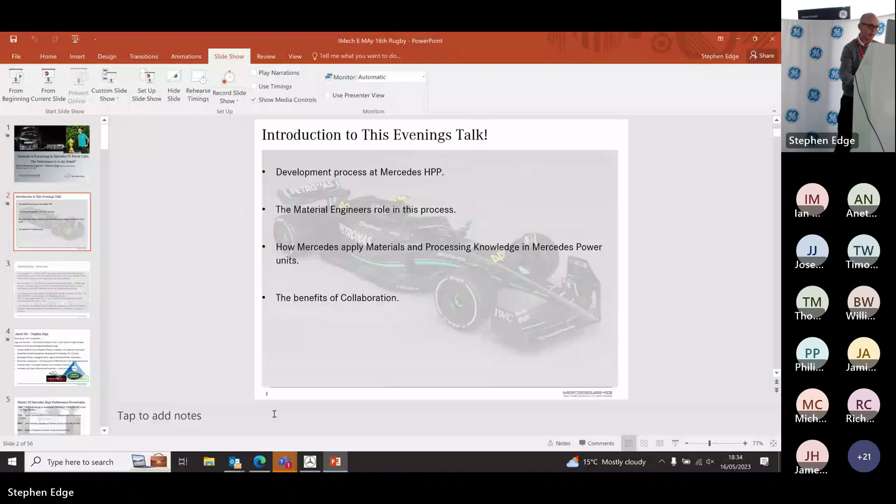Sure. Second. Here now. Apologies, just trying to get the technology right first.

Thank you very much, Naaman, for that lovely introduction. First of all, it's great to be here. It's lovely to actually see people in person. I have to say, it's been a very long time since I've done anything in person. I think it's been about 4 years since I've actually seen some faces looking back at me when I'm doing a presentation, so it's a genuine pleasure to see people here tonight. And of course, nice of people to join in as well on Teams. Before I go any further, I just want to say a big thank you to both Howard and Naaman, not just for inviting me here to talk today, but also for the hard work they put in. These events do take some putting together, organising, so a big thank you very much for the hard work you do to get these events working.

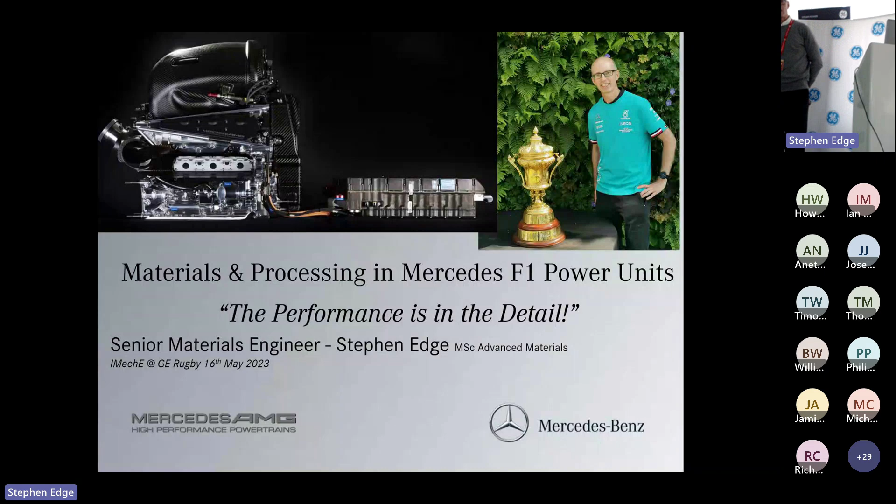Let me introduce myself. My name is Stephen Edge. I'm a materials and processing engineer at Mercedes High Performance Powertrain, that's where we make the Formula One engines, amongst other things. Today I'm going to talk to you about materials and processing and how the performance is in the detail.

Before I go any further, see if I can move that down there slightly. Not going to move, is it? Minimize it, that'll do. Right, quick introduction to what I'm going to talk about tonight.

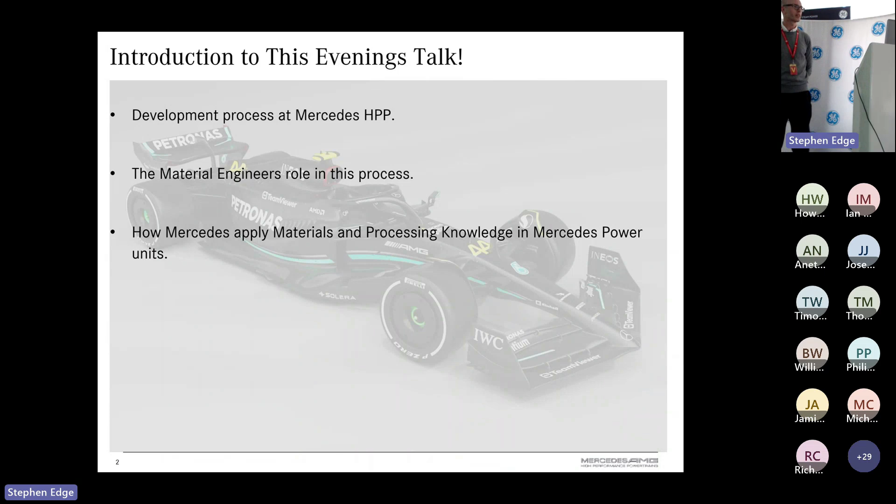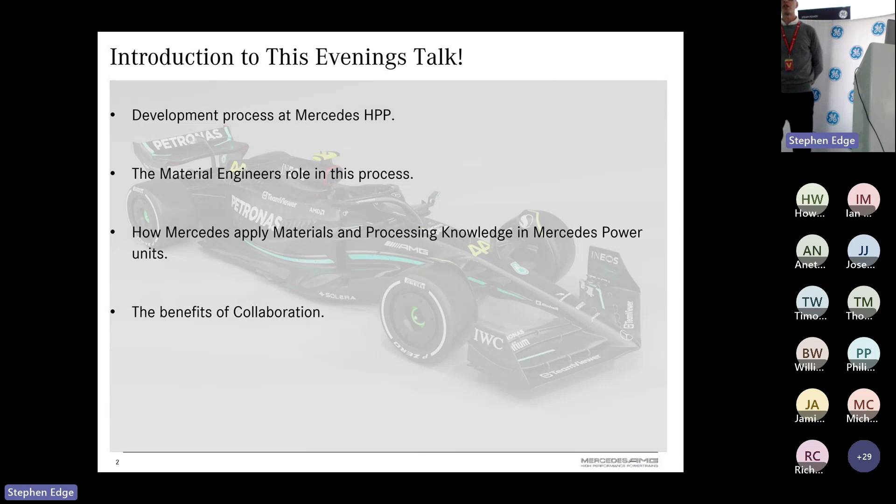First, I want to talk about the development process that we have at Mercedes. It probably follows along the same sort of development routes that a lot of engineering firms would recognise, but I think we do things a little bit differently at Mercedes. I want to talk about the role that materials play in this, and as a materials engineer, how I fit into those processes, and how Mercedes actually takes some of that knowledge that we get as a materials engineer involved in those processes, and how that fits into the power units themselves. Lastly, I really want to talk about the benefits of collaboration. So when Naaman asked me to come and talk, it's really a good opportunity to work with engineers, because on a daily basis I work with engineers, I work with manufacturing, and we really see the benefits of collaboration. Hopefully we'll be able to see the benefits of collaboration.

So a little bit about me. I think Naaman probably said a little bit more than I expected, so I'm just going to whiz through these. Growing up, I had two passions in my life, which are both Lego and Formula One, so that naturally ended up with being an engineer, but not a traditional engineer. I always had a materials and processing based career. Started off in research and development at Alcan in Banbury, diversified into doing things like PVD coatings, so DLCs and titanium nitrides, developing coatings like that. Worked in the aerospace industry, AgustaWestland, looking at military helicopters. That's where I sort of learned a lot of the failure investigation skills. Then at JLR, looking at powertrains, transmissions, and helping with the electrification side of things. Got myself an MSc in materials from Cranfield, and finally put all these skills together, working at Mercedes AMG High Performance Powertrains.

I want to say a little bit about Mercedes AMG High Performance Powertrains. I think it's quite important to understand the process, understand how Mercedes do things a little bit differently. So what is Mercedes High Performance Powertrains?

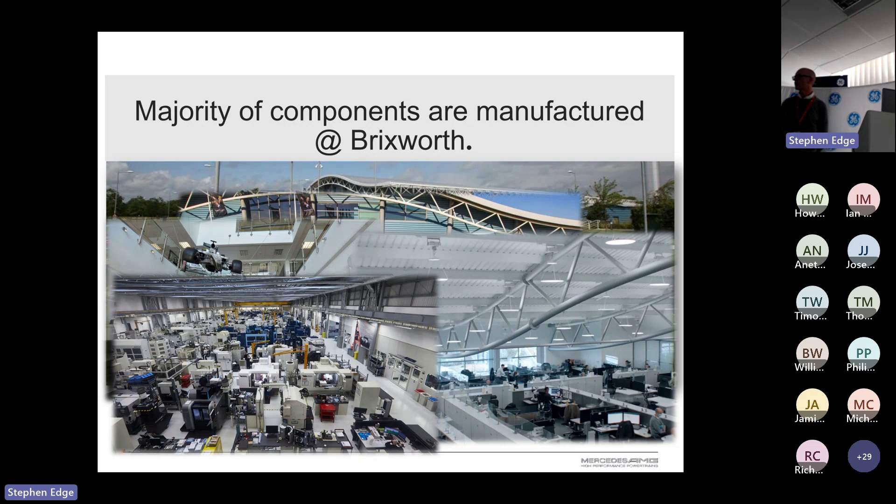Within Brixworth they've got the dedicated design centre. Right next door, quite literally 30 seconds walk from my desk, you can get to the manufacturing hall. The manufacturing hall makes something like 70% of the components, so all the machining happens next door. They've got a huge amount of capabilities, all sorts of different machines to get things turned around and manufactured quickly.

And then finally, they do the testing there as well. All the engines are tested on our dynos. We've got something like 8 dynos over at Brixworth, and that helps give us the cycle.

So you've got the ability to design the parts, you can then manufacture the parts, and then you can test them. What that generally means is if something's gone not quite as you expected on the dyno, within a couple of days we'll have it re-engineered, manufactured, put back on the dyno, and testing within a sort of 5-day turnaround. That's one of the key parts that helps fast-paced development—having everything under one roof and so accessible.

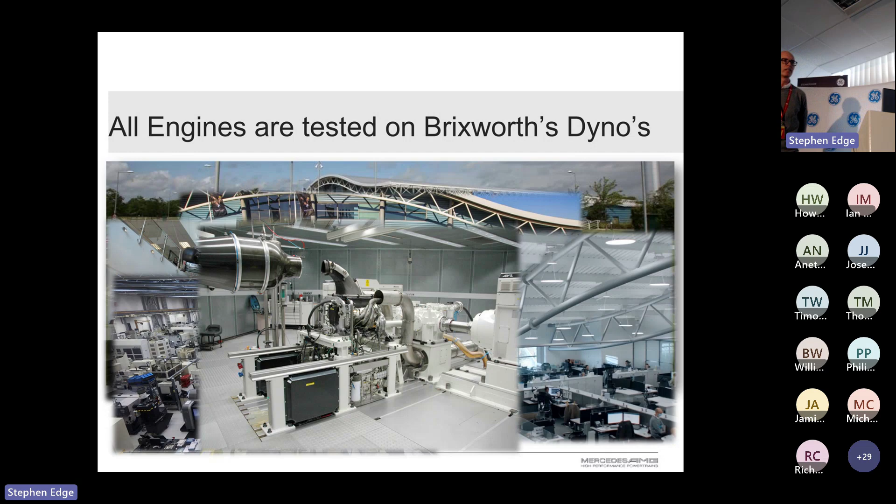We don't just do Formula One there. We're rapidly being seen by Stuttgart as part of their rapid prototyping, rapid development process. So we worked with Mercedes on the EQXX.

Not sure if anybody's aware of EQXX - this is a record-breaking car that's actually done 1,000 kilometers on one charge. At Brixworth we engineered the battery for that, and that was completed in a project time of 9 months from inception through to delivery of the component.

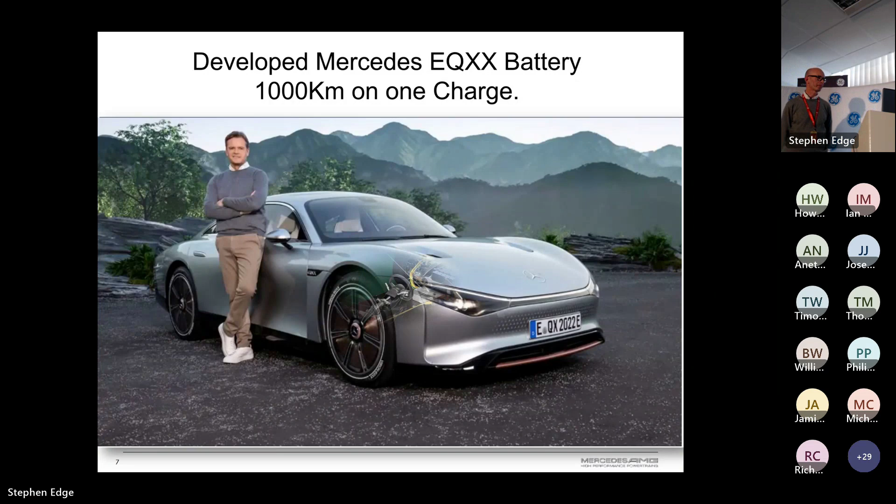We've also got very interesting projects down there. Project One, once again a very high-end project for Mercedes Stuttgart, is quite literally a Formula One engine in a road car. That was the biggest challenge we've had—trying to take a Formula One engine, and I can say wholeheartedly it is a genuine Formula One engine in there, trying to make it road legal.

That's one of the biggest challenges we've had, and we're still going through it, but I believe some of the customers now have those cars in their hands. So it's a real sense of pride down there for that project as well. We do other projects too—it's very much an engineering centre, but the main thing that we do is our Formula One project.

The main thing to think of with High Performance Powertrains is we are actually a supplier to the Formula One teams. We supply the powertrain to the Mercedes Formula One team, but also customer teams of McLaren, Aston Martin, and Williams as well.

That's a little bit about what they do down there. What is it that Mercedes HPP actually make? The reality is they make very efficient powertrains.

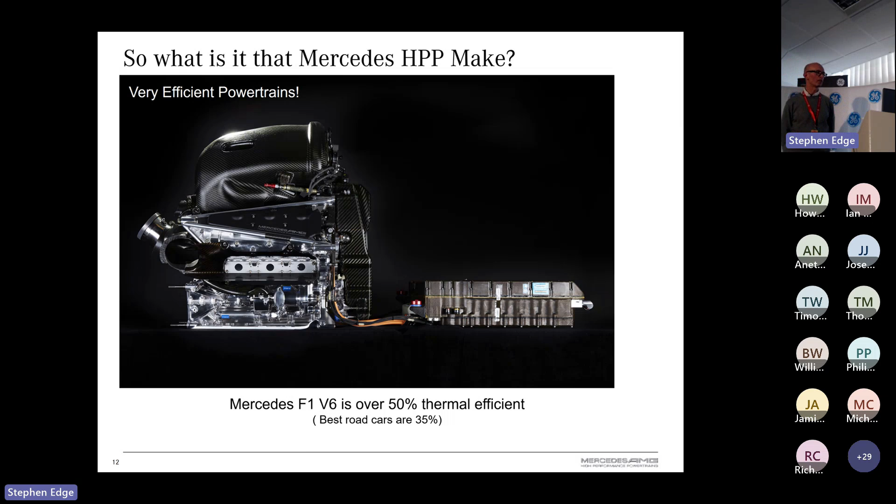The current iteration of the Formula One engine is a V6, and this is over 50% thermally efficient. The average road car at the moment is 35% efficient, so it's a much more efficient power unit than you can get in general road cars.

And how do they do this? This is a 1.6 litre 24 valve V6, 15,000 RPM, and they have two powerful motors in there that really make a big difference to the power unit. The first one is the MGU-H. The MGU-H is an electric motor that goes within the exhaust system, and when the exhaust gases go through it spins a turbine that generates the electricity that goes into the battery.

When the engine's not spinning so high, it turns into a motor, and that spins the turbo to get rid of turbo lag. So it's quite an ingenious and innovative component.

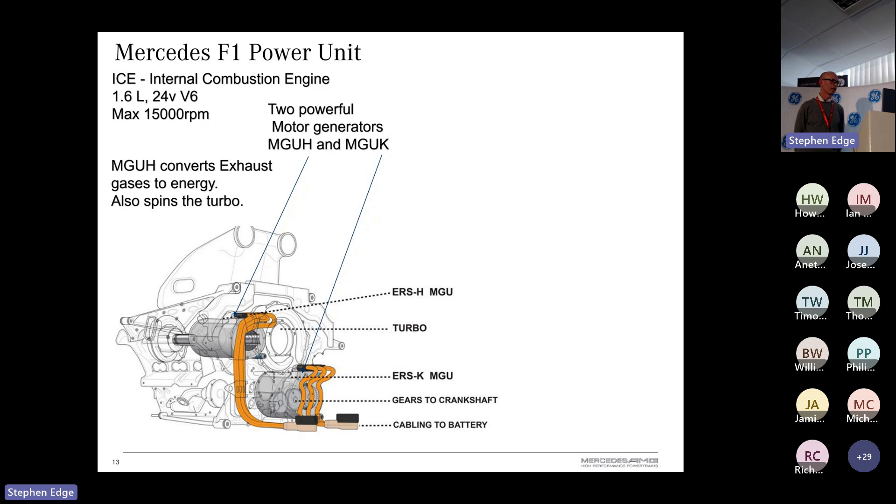The other side is the MGU-K, motor generator unit kinetic. The kinetic side is because it's connected directly to the crank, so that provides another 160 horsepower worth of electric power on demand.

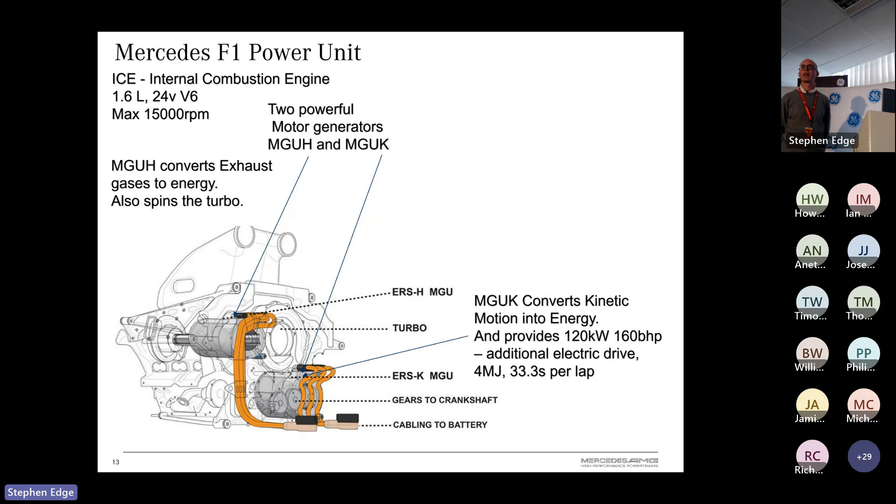So it's 33.3 seconds per lap. And under braking, that turns into a generator as well, feeding energy back to the battery.

And of course, the last bit, probably the bit most people forget, but one of the hardest working parts, is the battery.

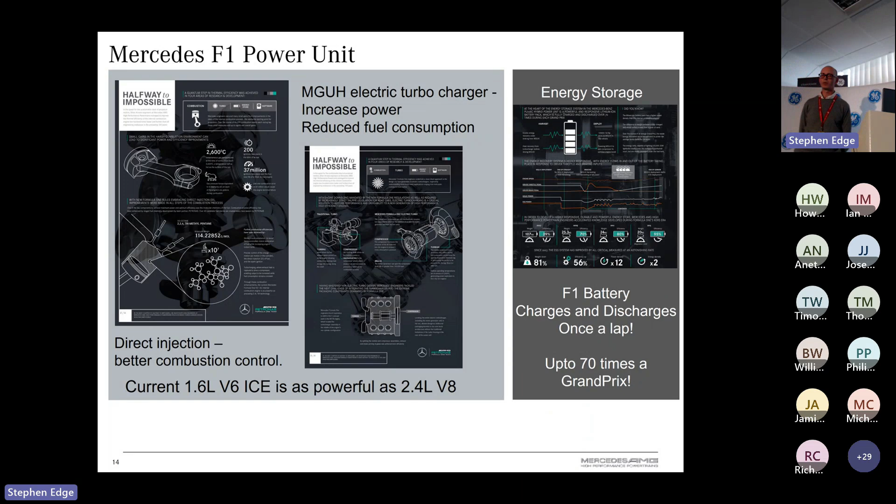So in Formula One, the batteries and battery packs you see are very different to anything you'll see in road cars at the moment.

So that's a lot about Mercedes, a lot about the projects and things that we do. But what I really wanted to talk to you about today, and try to piece it all together, is how does a materials engineer work in this environment, and what do we actually do to improve things?

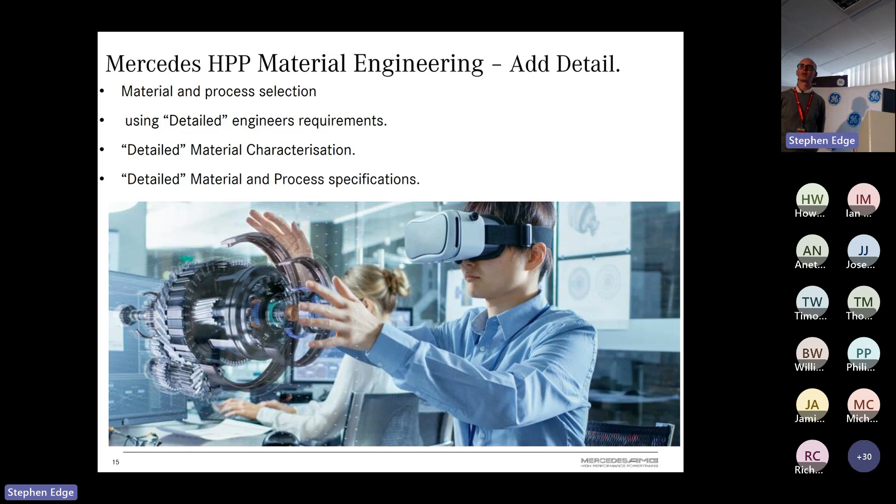And then lastly, material and process specifications. Having done a lot of work on characterization, you have to make sure the properties you get are accurately reflected in the manufacturing processes used, so we've got to make sure it's a robust manufacturing process.

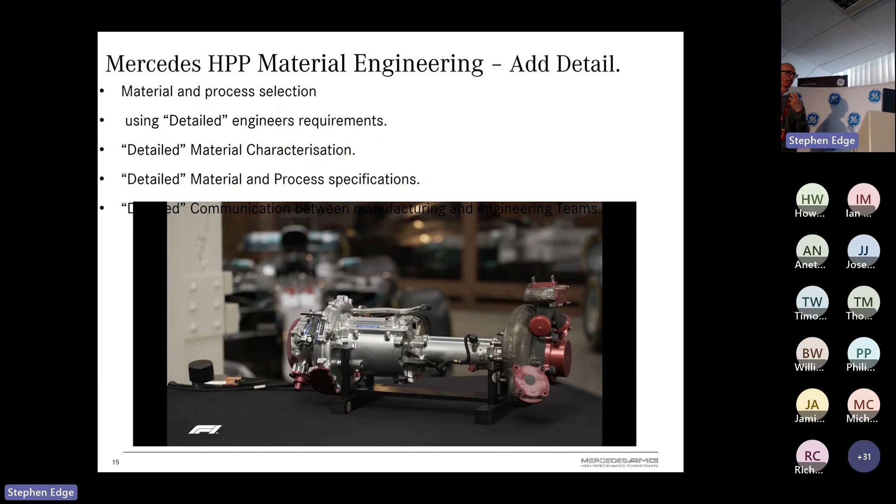So quite often we're just that link with detailed communication between the engineering teams and the manufacturing teams. This is where we add value, trying to take the engineers' brilliant ideas and make them into reality for the manufacturers to actually create what the engineers wanted.

So we've got a few constraints in there. What sort of constraints do we have? In the motorsport world, we're a low volume manufacturer, so we can't go and get people to develop materials for us, because we make maybe 50 parts, 80 engines a year maximum. Nobody's going to develop engine materials for us, so we're restricted to use whatever's available.

So we're quite often using what's available from aerospace, from automotive, but also the FIA technical regulations - that's one of our biggest restrictive constraints. They require that anything we use, all manufacturers are able to get hold of as well, so anything that Ferrari use, we should be able to get too, and vice versa. We can't create our own processes and squirrel it away - it's deemed unfair, apparently, so we're not allowed to do that.

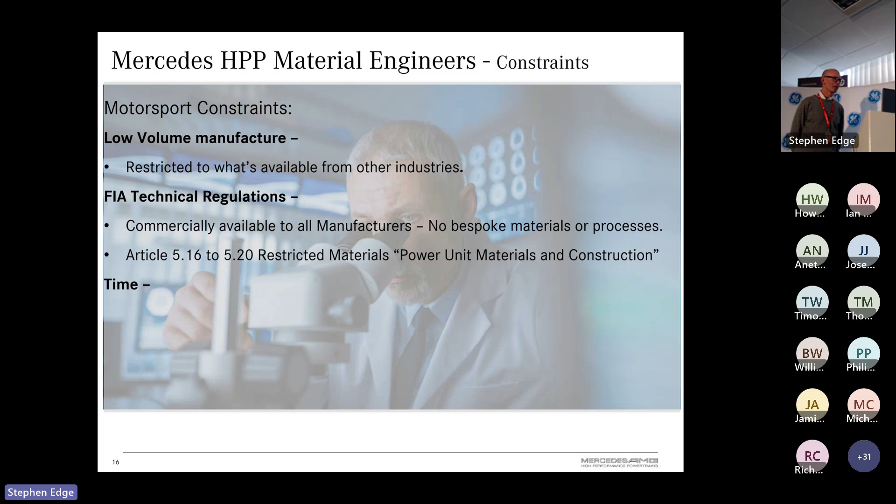We've got restrictions on the actual materials we'd like to use. We'd like to use things like metal matrix composites and magnesiums, but the FIA regulations restrict what we can use. But there are also some grey areas where you can sometimes exploit the rules, so that's one of the fun sides of the job as well. But the biggest constraint that we have is time.

When the red lights go out, whether you're ready or not, you've got to be ready, essentially. So at Mercedes, time constraints drive everything that we do.

The issues that we have are generally trying to get applications and processes ready. Quite often an engineer will require us to come up with an idea, whether it's been driven from a failure investigation or something they've developed. We have to act fast to provide a very robust application process, whether it's a new forging or a coating, we have to make sure it's applied robustly.

Sometimes we have to do bespoke testing. We have to get a little bit innovative. Sometimes we just don't have the time to go and get tensile specimens made out of a component, so whether it's just a hardness check, something very rudimental. We've made 3-point bend tests out of tiny little specimens just to try and understand the strain rate of a nickel plating. So we can do all sorts of different tests.

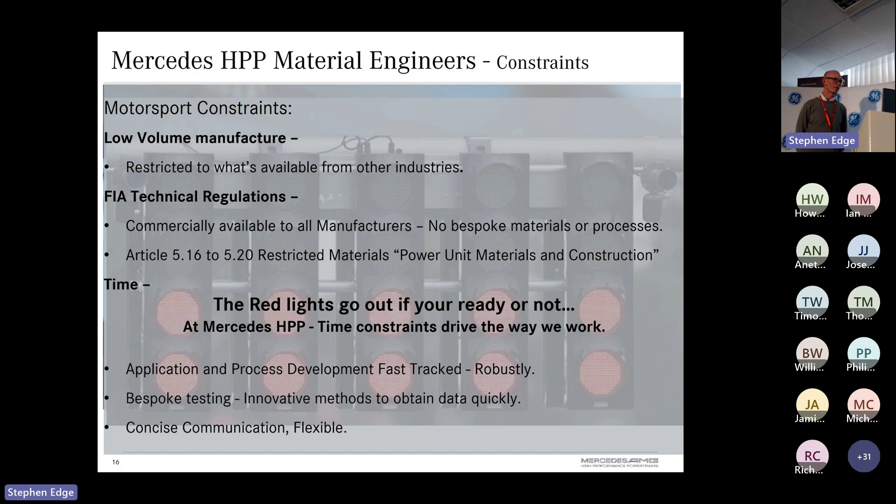So that's a bit about materials engineering at Mercedes. I like to think that the role is always split down into four main points, four key application processes that we're involved in.

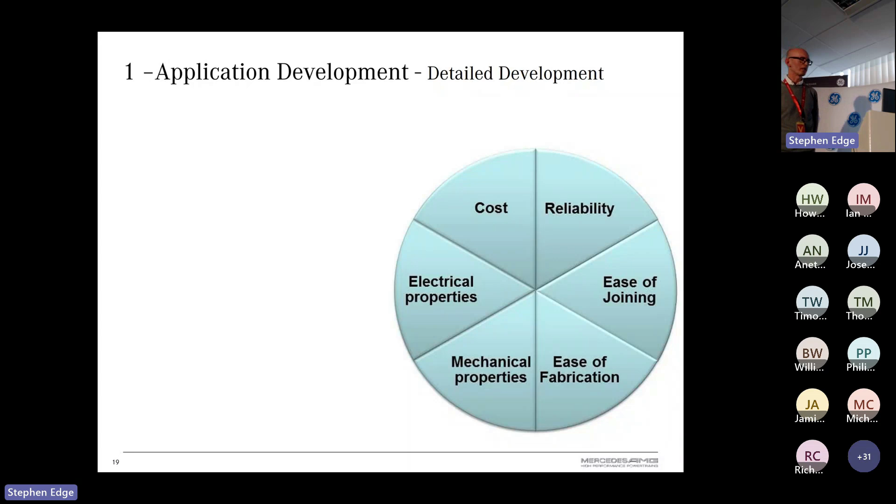So we've got the development side of things, where we add detail at the development process. The engineers define the concept, and we provide whatever materials or processes we think fit the bill to get their concept working the best. This time can vary anywhere between one week or six months, depending what the issues are.

The sort of materials that we quite often use though are things like aerospace alloys. We're very fortunate in that we can get hold of aerospace grade nickel alloys or titanium aluminides, and we can use these sorts of materials. As a materials engineer, it's an absolute dream to be able to play about with some of these more innovative materials.

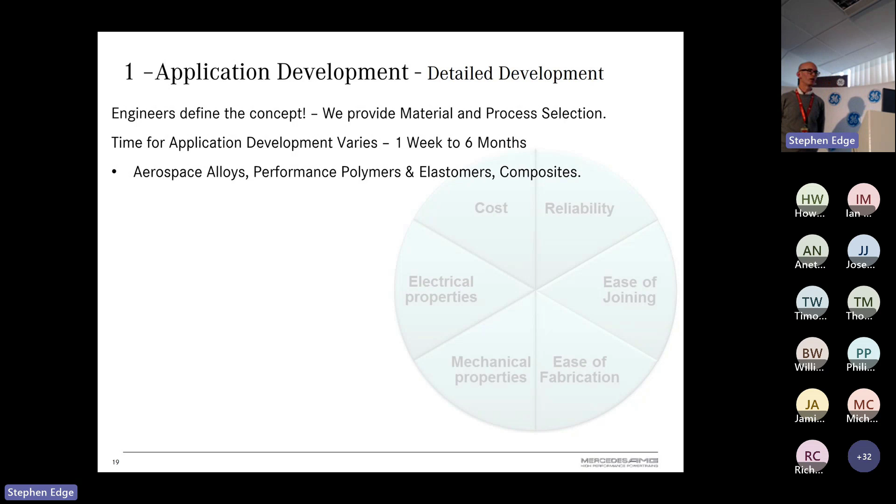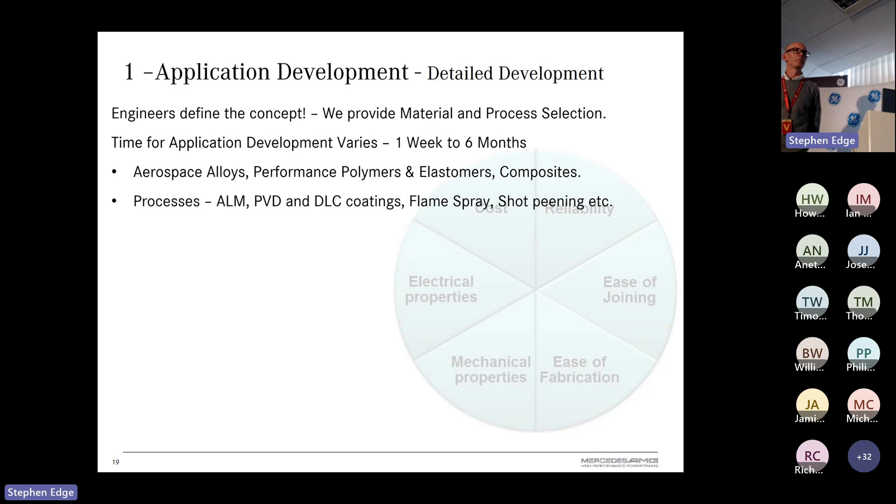We use things like performance polymers, PEEK is something we regularly use, things like polyimides, elastomers, and we use some composites as well. We also have access to all the different processes, so anything like additive layer manufacturing, physical vapor deposition, DLC coatings. We apply whatever's required to make the component live in the very harsh environment that is Formula One.

We have to do all this with the restriction of the FIA regulations, say articles 5.16 to 5.20. Those are really our Bible, that tells us what we can and can't use.

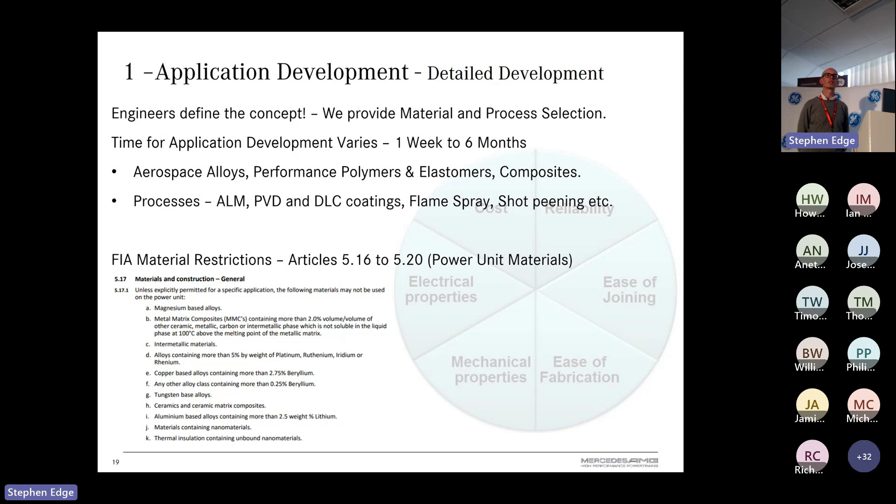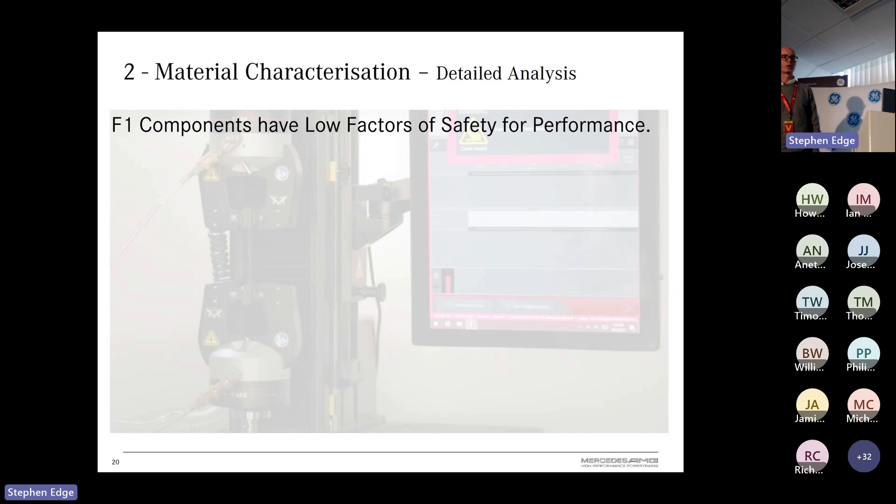Materials characterization, I touched on that earlier, but this is where materials engineering, we're once again adding the detail. We've got very low factors of safety within the motorsport world. The reason for the low factors of safety, fairly obviously, is performance. We have to make sure we don't have too much excess material. We want to cut it down as much as possible, that's the only way you're going to win.

So if you've got such low safety factors, you've got to get very accurate. I think this is one of the key parts where materials engineers make a big difference, is that we make sure we have very accurate material properties. So whenever we're doing any characterization, we make sure we've got the material processes involved.

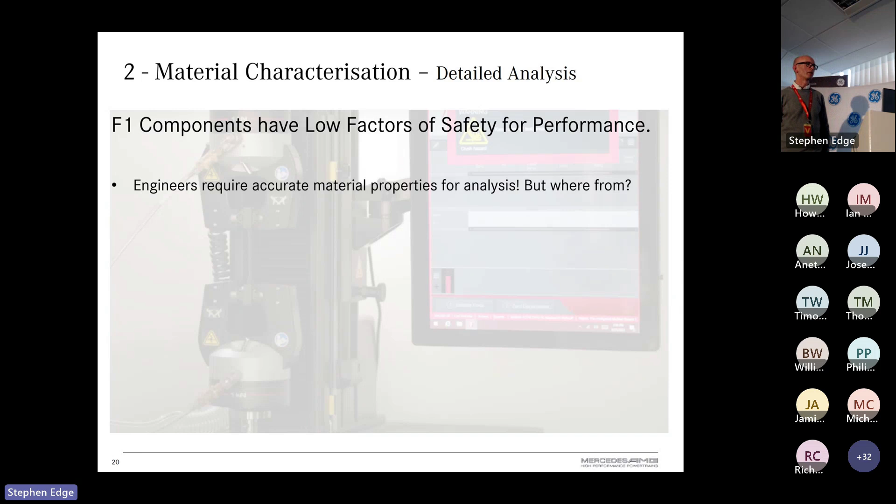If you think about where do we get properties from, you can try Googling it, but I'm not sure if you're going to get the properties of nickel alloys at 800 degrees. That sort of thing just doesn't really exist. And even if you could find it, would you trust it? Do you know anything about the data analysis that's gone behind it, the material that it's got there? You can't do those sorts of things.

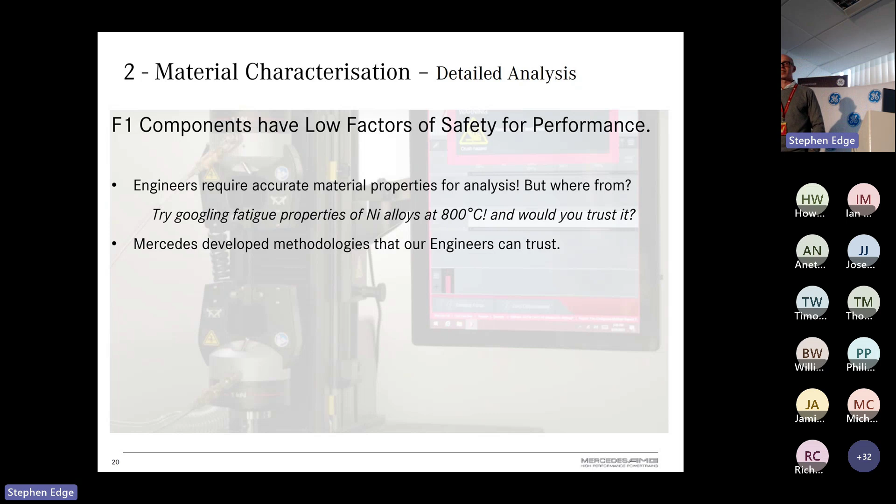So at Mercedes, we have a highly developed methodology that the engineers trust. All our data, all our processes that we use, and all the materials that we use have been captured and characterized by ourselves.

The key part is that we make sure we've got the manufacturing processes involved. So whenever we're doing a material characterization, we make sure we're not just doing the material with the right heat treatment, we make sure we've got the right surface finish, the shot peening effect, and the coating that's actually going to be applied.

Because when you're working with factors of safety of about 1.2, you can't afford to be anywhere slightly off. So we've got to make sure that we replicate absolutely everything the component is going to be in there, so that the engineers can put it into their analysis.

Once again, sometimes we do our own bespoke testing, depending on what we need to do. If we can't find an off-the-shelf test, we'll do our own test, whether it's testing the wear of an abradable coating or something along those lines, to generate our own data.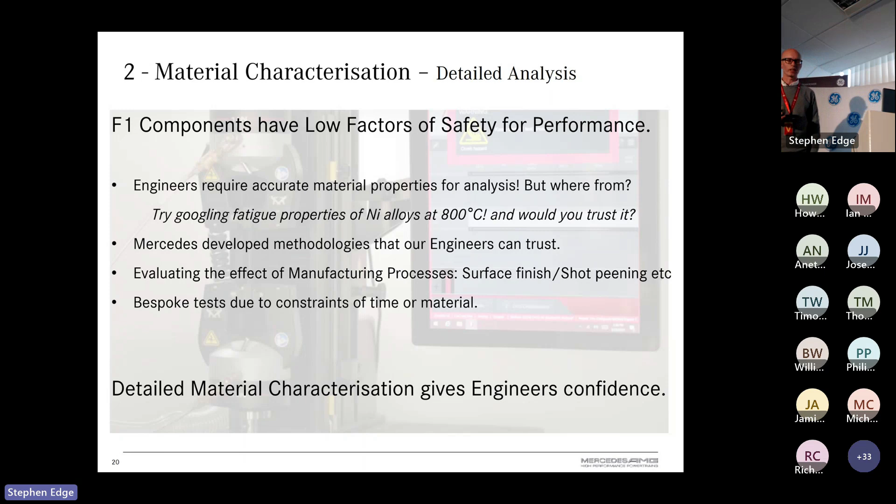But it's this detailed characterization that really gives our engineers the confidence, so they can design down to the factors of safety that get us the performance.

The third part of this is materials and processing controls. Having done all the hard work of the characterization, making sure you've got the right properties and the right surface finish, you've then got to make sure that when it comes to manufacturing the components, you are going to be getting what you've already measured the properties for.

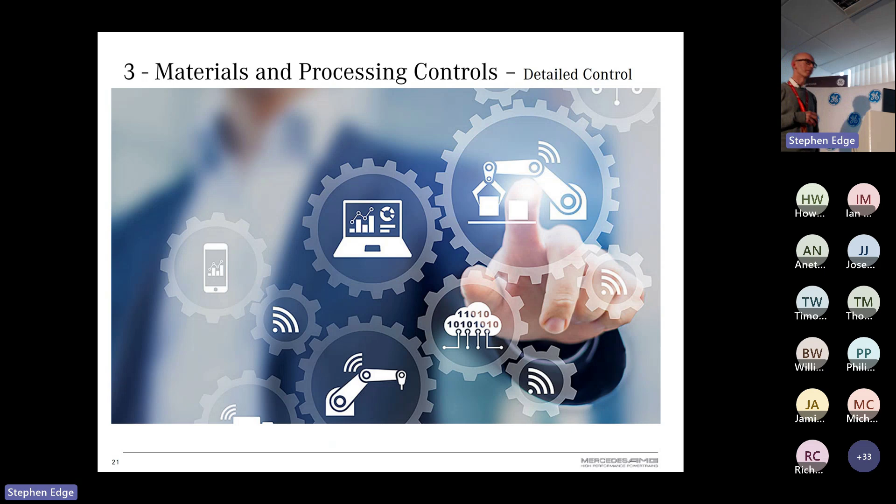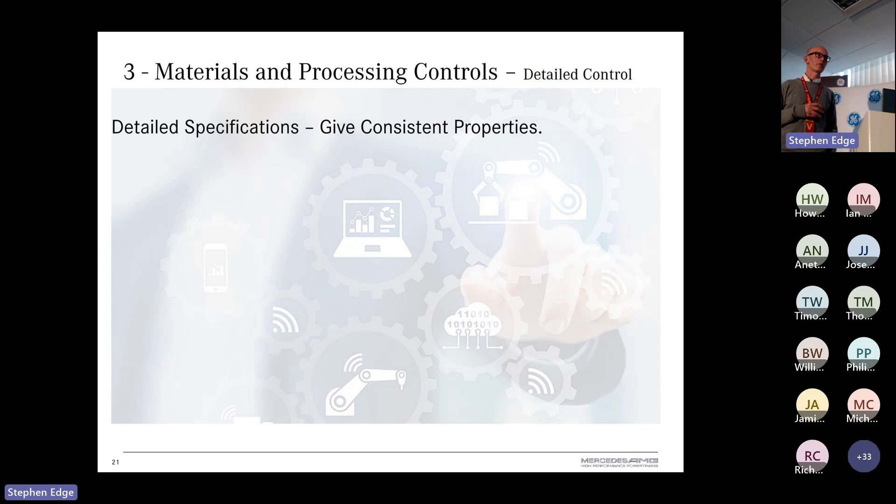So we've got to make sure we've got a detailed specification with a very small processing window. This is the key to getting consistent properties. We don't like surprises, and we've got to make sure we get consistent properties from our supply chain or from our internal manufacturing.

We do that through detailed development of our supply chain, so the suppliers are actually developed. We have a selection of supply chain companies we work with, and we treat them as an extension of our team. They are all aware of what we're trying to do, and they're all brought onto that same mentality of high quality. We've got to make sure the internal documentation captures the process envelope.

It's absolutely crucial that we don't have a very wide manufacturing envelope for our parts. But also traceability is a real key part, and that's really for things like failure investigations.

We make sure all our supply chain knows exactly, down to the serial number, how they can trace back to what they have manufactured and what heat treatment process was used, things like that. There's some real detail that we go through, and that helps with our development feedback loop.

So all the team members and suppliers understand the consequences of any change to the process. They know that if you've got any change in surface finish, residual stresses, or microstructure, the properties are going to be very different to what you've measured, and that means the component is going to behave differently to what you're expecting.

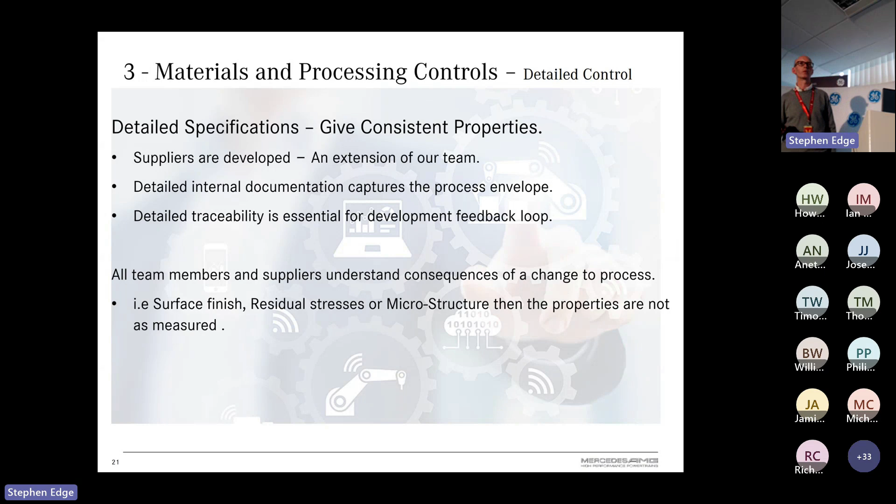So a quick example of how we would complete a process development on a component, and how a materials engineer would fit into that: let's take an additive layer manufacturing metallic component as an example.

The engineers would come to us and we'd talk through what it is that they're after, what sort of properties they need, and then we'd look at our chosen supply list. We'd have 3 or 4 different suppliers we'd work with, and we'd select which one depending on various constraints, like material properties, volumes, and how quickly they need it.

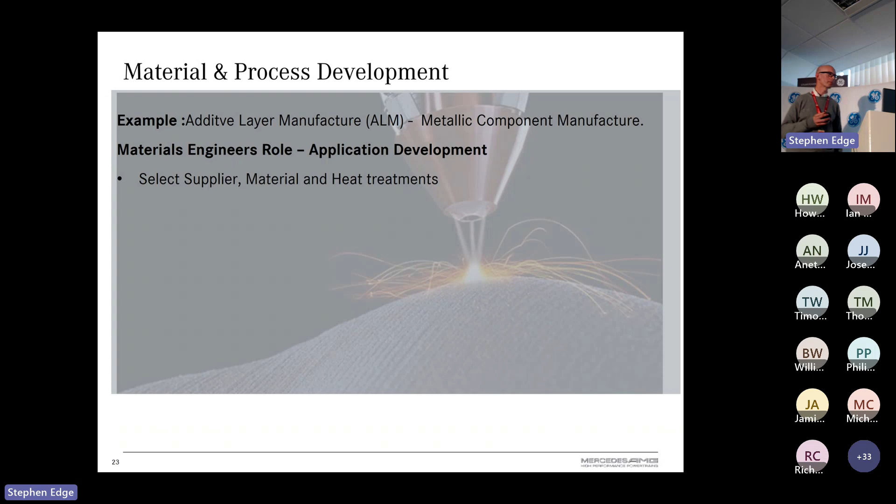So that would be the application process, the development process.

Then, if we don't have material properties, we'd have to go away and measure the mechanical properties of the part. We have to make sure we've got the properties of the component with, say, the exact powder size, the right powder, traceability of the right powder, and whatever properties are needed, we would be doing those tests, whether it's fatigue, thermal, whatever the engineers need for finite element analysis.

We'd always be making sure we're putting into that the surface finish, for instance. We have to do a HIP, heat treatment, shot peening.

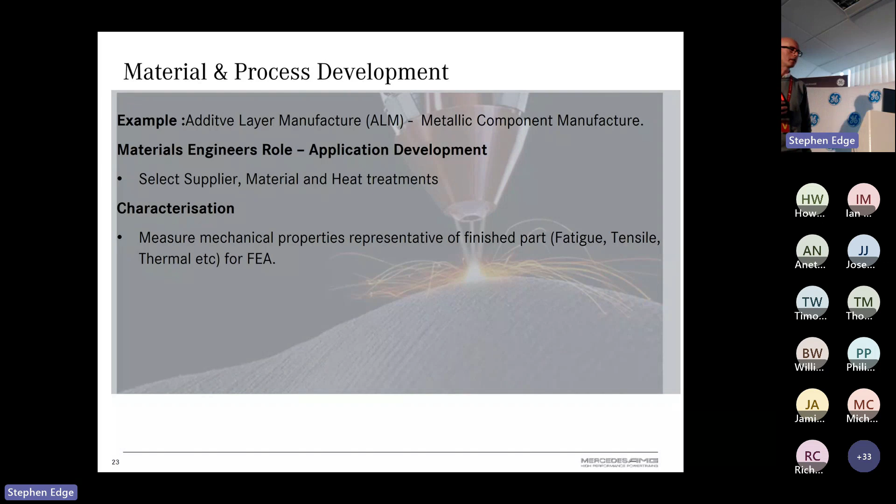We'd make sure that all that is put into the testing to make sure our results are accurate. And then finally, the standards control side of things, making sure the requirements capture exactly that process envelope.

So we'd make sure the processing requirement window is as small as possible. We also make sure we've got an inspection criteria, whether it's something like having a tensile test specimen made up with the components, so you can test each one to get that feedback loop, whether you're doing NDT testing like CT scans or something. We put all that detail into the specification as well.

So each step of the way, we'll be working with the engineers, taking their ideas. We're working with the manufacturers as well, manufacturing engineers and the supply chain. And we'd be, as a materials engineer, in the central hub, trying to capture all that data, generating the right data for the engineers, making sure that detail is all captured and the results are correct.

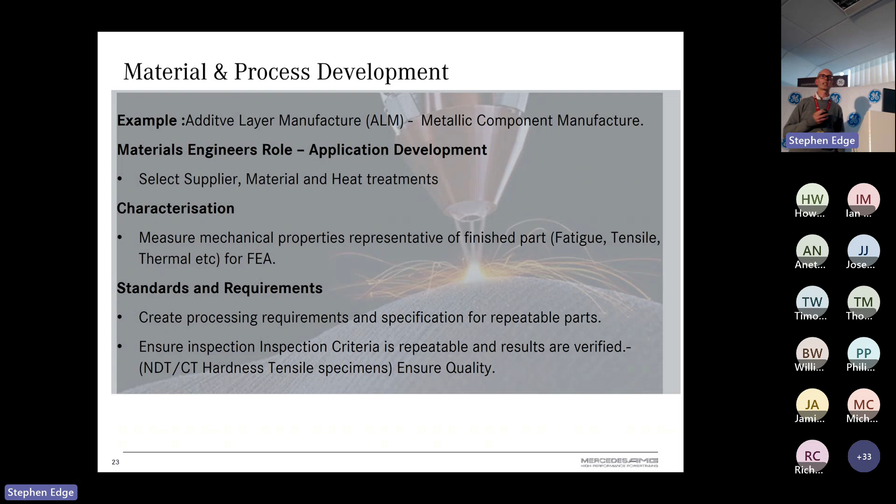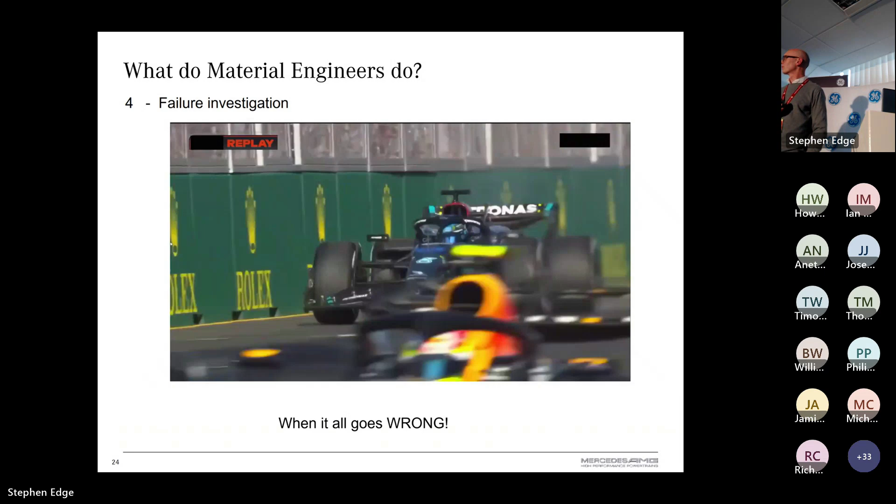And of course, there is the fourth element of what materials engineers do: when it all goes unfortunately wrong. You may recognise this from a couple of races ago.

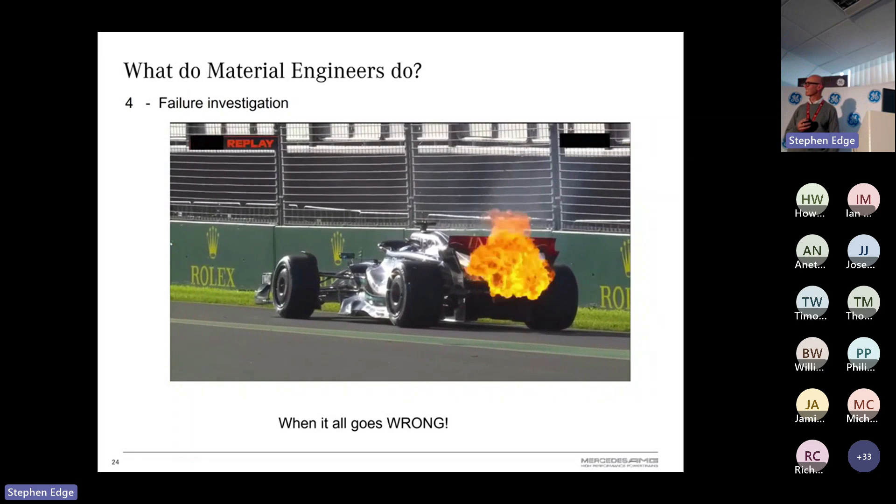It's like these that really ruin my Sunday, I can tell you. I know my week is going to be very bad when I see things like this. And George didn't look very happy either. But yes, failure investigation is a big part of what we do as a materials engineer as well.

And when we see things like that, the engineers want to know three things. What's the failure mechanism? Has it failed by overload? Has it failed by fatigue?

And where has it failed from? Has it been a manufacturing defect? Is it design? Is there a material defect in there? And does the material comply with the requirements?

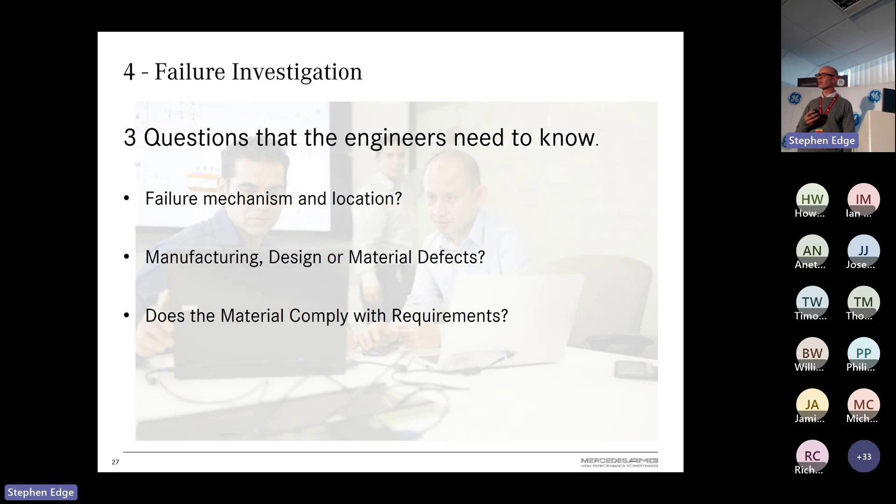I've lost count the number of times the first thing people say is, 'Oh, check the material. Is it the material's fault?' It's generally, I think, 2% of failures are ever actually a material fault, but it does happen. That is true.

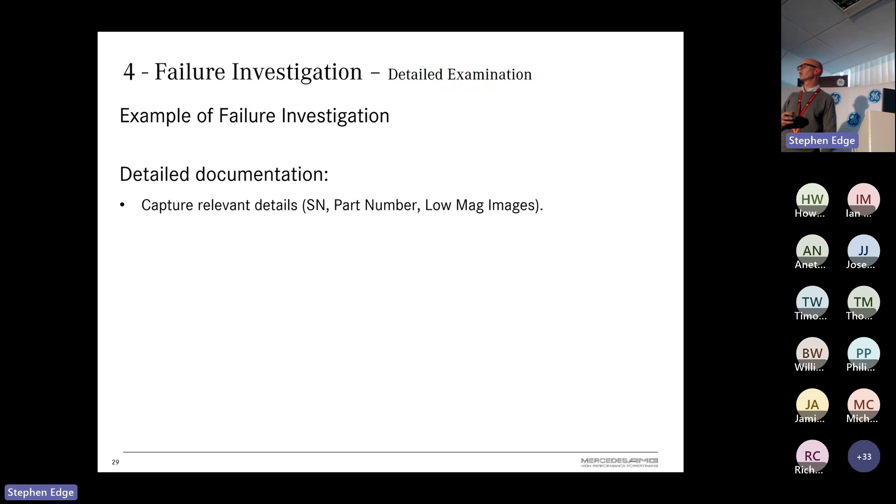So a quick example of a failure investigation. Once again, materials engineers are there hopefully capturing the details, things like serial numbers, part numbers, getting low magnification images, making sure everything is captured. And then we're going to be collaborating with the engineers, understanding what was going on with that particular powertrain before it went bang.

So we're extremely fortunate that we've got sensors all over everywhere. We know exactly what this engine was doing up to a millisecond before it went bang. So quite often we're led in a certain direction of what has gone wrong.

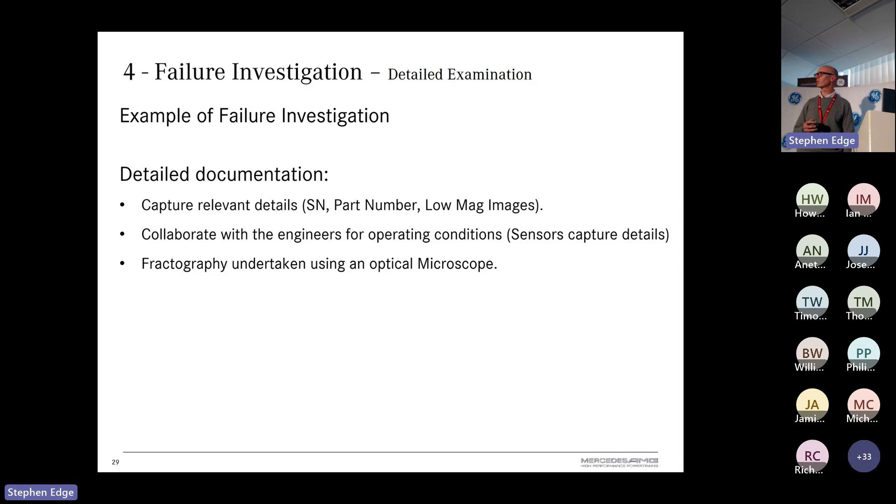And we'll take a look at it underneath the microscope and do a bit of fractography. Unfortunately, I'm not particularly very good on that. But we've got a component here.

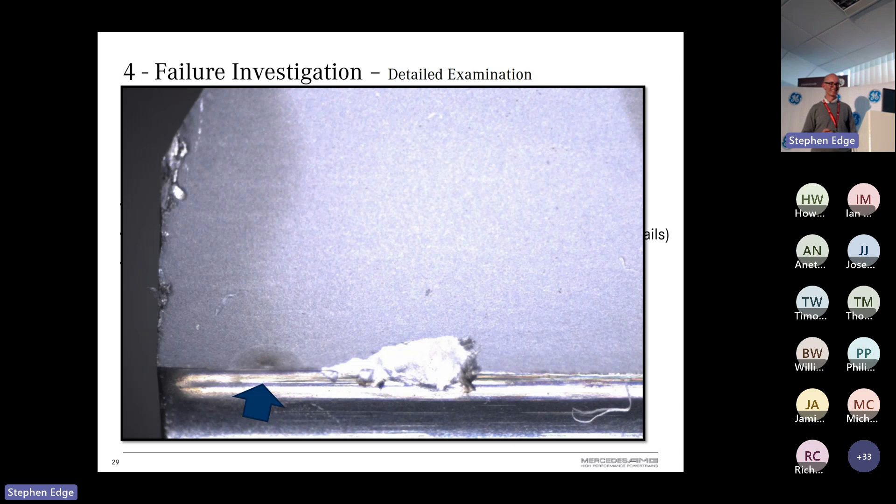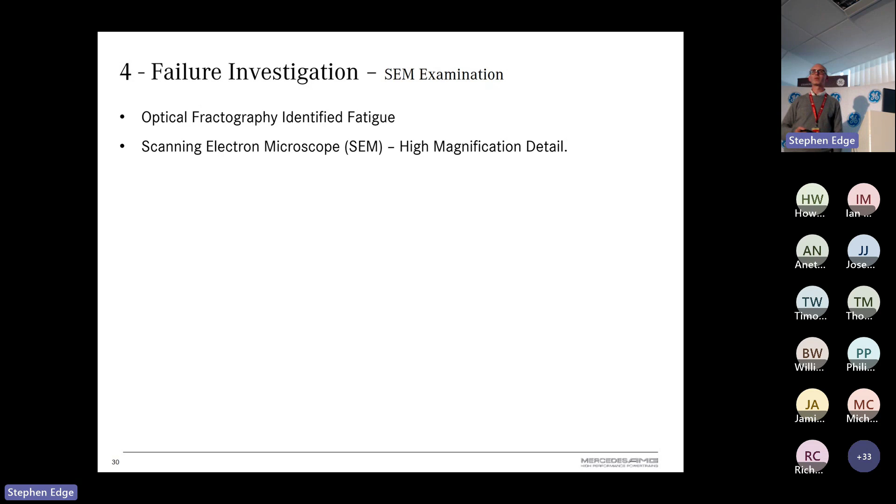So we've done a bit of optical microscopy, looked underneath the microscope, and that's told us that yeah, the component has failed by fatigue. Then we can get a bit more detail. We take a look at it under the SEM, the scanning electron microscope, and that gives us a bit more detail.

We have a look on the SEM, and we can see that it's not actually failed at the surface. It's a subsurface initiation, which looks like some sort of non-metallic inclusion. So we know that if it's not surface initiating, there's definitely some sort of issue there, and we've got a non-metallic inclusion. But that's not really the end of the story, because we need more detail on that.

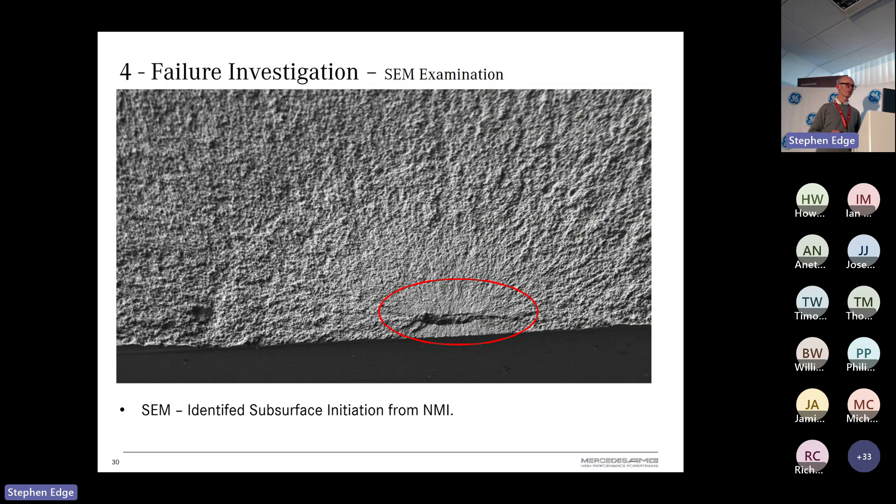We need to understand a bit more about what that could possibly be. So, as it's been identified, we can use the SEM again to get some chemical composition.

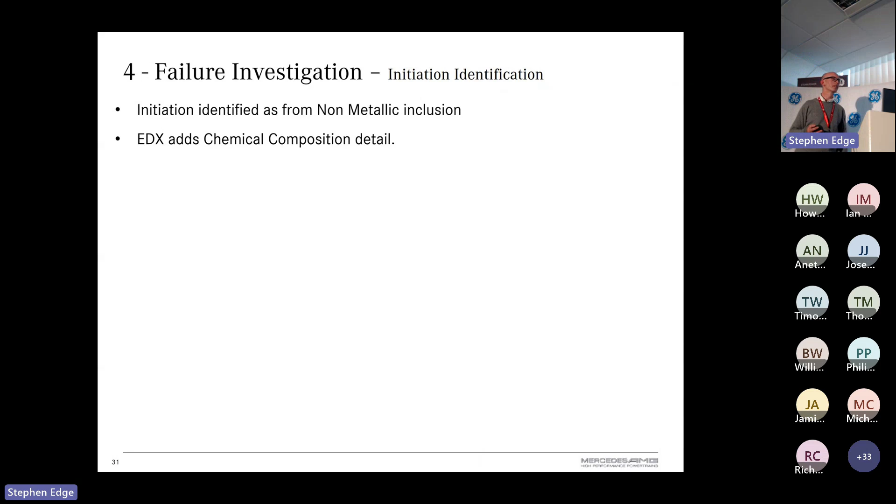So that's actually a fairly standard indigenous non-metallic inclusion. It could have been part of the steel making process, in fact part of a refractory, the crucible or something like that. But in actual fact, it is a fairly standard inclusion that you can find in steels.

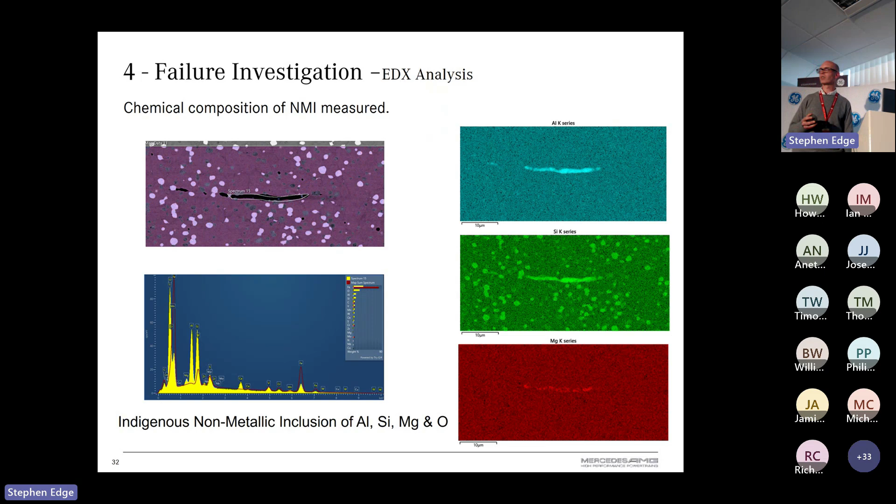So we've generally got the detail of what's actually caused the failure. And at Mercedes, you then have a whole raft of activity that goes on. The quality department go into overdrive. They have to identify the location of all components with that material batch. So we've got a further 8 engines out on the racetrack. Have they all got the same inclusion in here that could cause the failure?

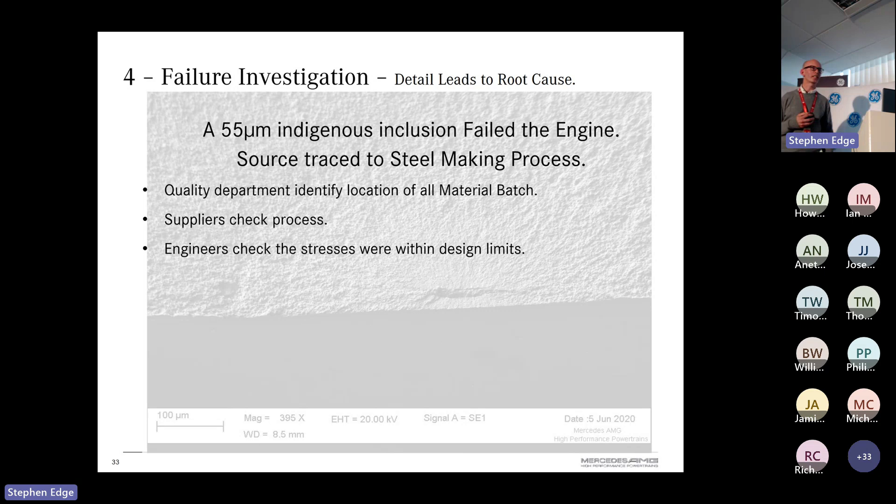We have to find that sort of thing out. We go back to the suppliers, understand what processes they've been using to check - is there anything different in there? And the engineers actually go and check the stresses were within design limits. So is this a one-off, or is it that all the steels actually have this in and they've got their calculations slightly wrong?

As a materials department, we go back and we actually check our properties. We have to make sure that any of our fracture surfaces have that sort of size inclusion in there. If they do, that means we've included that into our characterization, so therefore the numbers are right. If we haven't, then we'll have to look at re-evaluating.

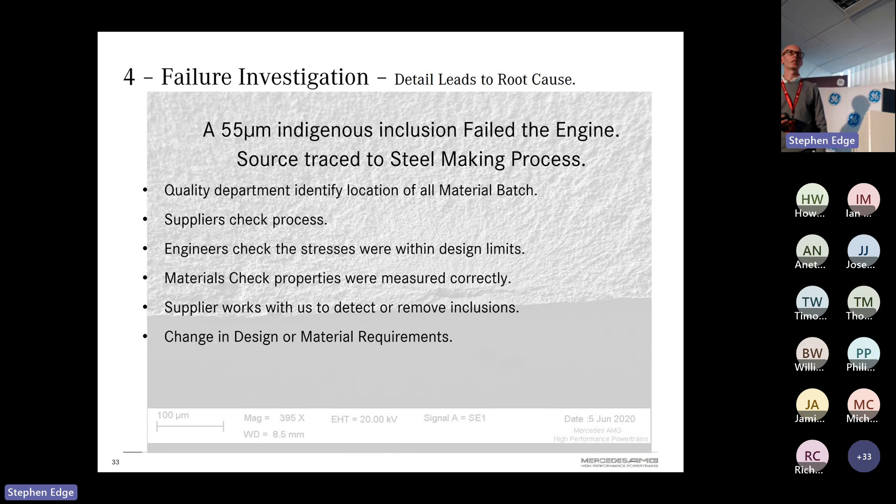And the supplier will work with us as far as they can to try and remove some of these inclusions to the best of their ability. And the result will then be, do we change design because the stresses are too high? Do we change material requirements to make sure we've got other things in place to protect against these sorts of issues? That's the sort of feedback loop that materials engineering provides to get the detail into the failure investigation and feed back to the whole of the business.

So this is a simplistic view, but hopefully it shows that materials engineers are in quite a few, every step in fact, from the start to the end of the feedback loop. We're in there at concept review, adding the detail to make sure that for the application we've got the right materials, we've got the right processes in place. We're there adding detail in the material characterization, making sure you've got the detail there.

At Mercedes, we're also there at manufacturing, making sure the controls are in place, the specifications are there, to make sure we've got very accurate and very robust processes. And if we haven't done quite a good enough job as a team, we go to the engine test and it doesn't quite work, then we're in there in the failure investigation as well.

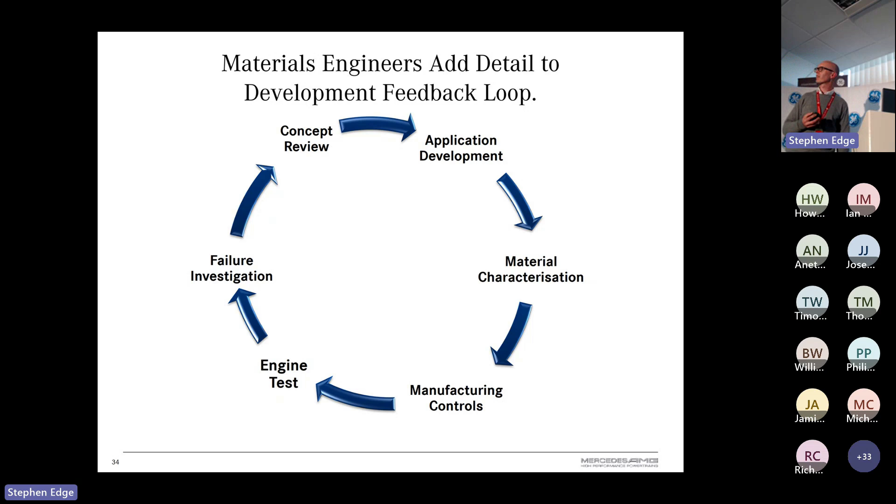And we go back around that failure investigation, add in the detail, go around that loop until we finally have some success.

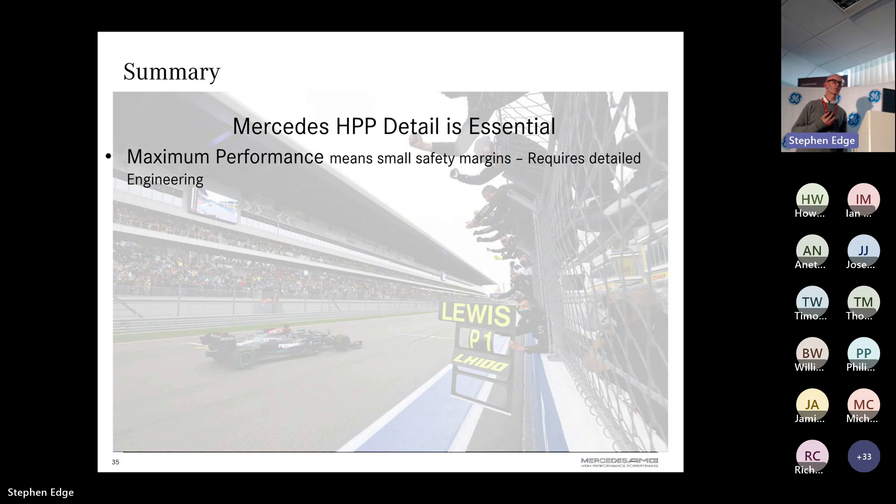So really, in summary, at Mercedes we see the detail is essential. Maximum performance comes from small safety margins. When you've got the small safety margins, that requires real detailed engineering. And at Mercedes, materials engineers are there adding detail from concept to failure.

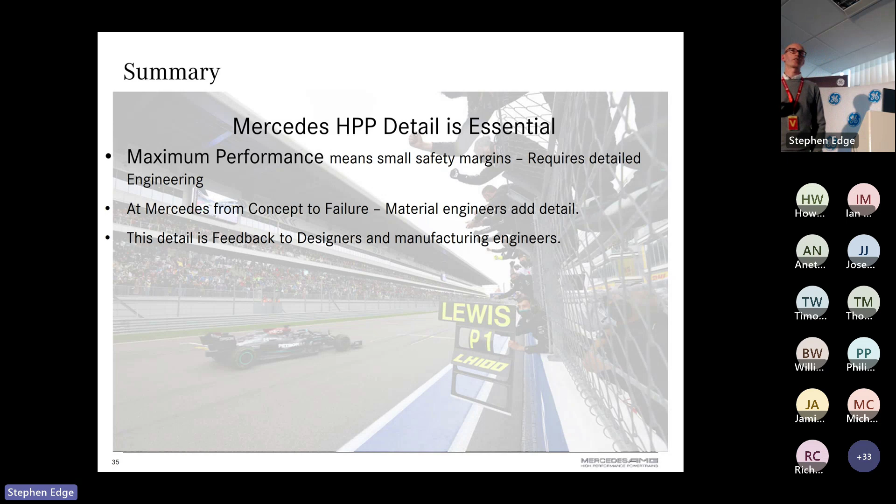From cradle to grave almost. And the detailed feedback that we give to the designers and the manufacturing engineers all the way through that process, that's one of the key parts to keeping the properties right, making sure the safety margins are low. And it's this close collaboration which helps us balance that fine line between maximum performance whilst avoiding failure.

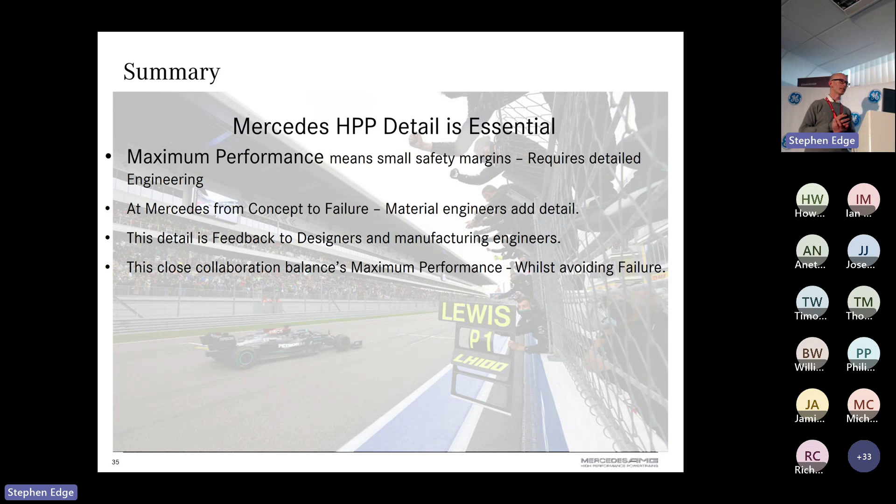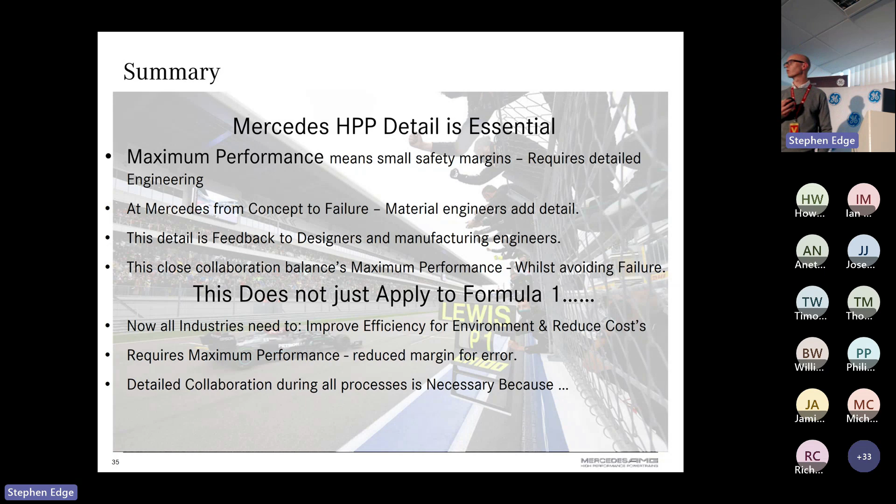And I suppose the one thing I wanted to take home from today is this doesn't just apply to Formula One. All industries are being driven to have improved efficiency, whether it's for environmental reasons or to reduce costs. And whenever you're reducing your margin for error, you're maximizing performance, and vice versa - when you're maximizing performance, you're reducing your margin for error. And it's that detailed collaboration during all the processes between manufacturing, materials engineers, and engineering in general that is necessary, because the performance is in the details.